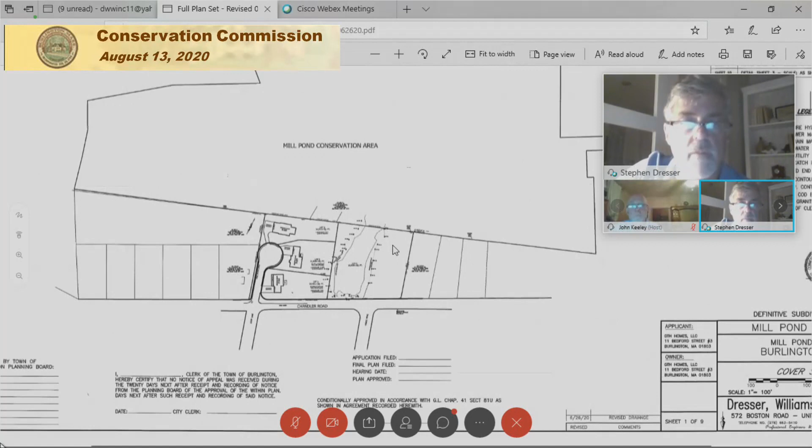For the record, Stephen Dresser, Dresser, Williams & Company. I'm representing GRH Homes. Greg Hickox and Bob Richard, the applicant, are also here on the meeting. The proposal before you is a 4-lot subdivision. It has 3 homes, a roadway, the utilities, an associated drainage system, and a 4th lot that at this time is not to be developed. The intent of the 4th lot would be donating it to the town of Burlington. We're right next to the Mill Pond Conservation Area, and this would be, I'm sure, a welcome addition to that area.

We have previously appeared before the board for a resource delineation. There is a vernal pool on the project, as well as bordering vegetated wetlands. We did receive an ORAD, an order of resource area delineation from the commission prior to this filing. Okay.

When the applicants, who just so you know, they are actually intending on living in, Mr. Richard in Lot 2 and Mr. Hickox on Lot 3, are going to build their personal homes there. When they first approached the town, they intended to build 3 frontage lots on Chandler Road. There's plenty of frontage to do that. They would have had the ability to create driveway easements and such, so they could build 3 houses. One of the houses would kind of be located behind another. When they went to the planning board, it was suggested that we make the effort to look into whether or not we could do a reduced size road with the lots and create a subdivision with the thought that it would be more attractive and fit into the neighborhood a little better. So Mr. Hickox and Mr. Richard asked me to look into that, and this is the result of that.

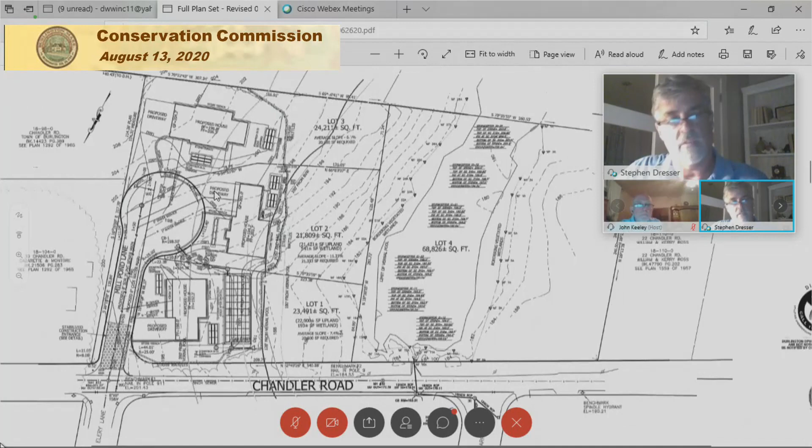Again, the reason for that is the extra protection warranted by the vernal pool. The drainage on this all kind of flows down this way. There's a high point up in this area and this area, and it flows down to this. So everything kind of flows onto this lot and then down to the vernal pool. None of this flows towards the easterly neighbors or back toward the conservation area. There's a little bit of a dip in here, so the front of the road actually comes back onto the lot as well.

The drainage is done consistent with the Massachusetts stormwater standards. The system itself has a catch basin at the low point of the cul-de-sac. Again, the flow from here, from the lots, and even the road flows down to this. This will then flow into an infiltration system. The infiltration system currently is designed with an isolator row, just to remove the suspended solids.

The soil conditions out there warrant additional pre-treatment prior to the infiltration system. We had a forebay in here, but the Board of Health, which is the advisor to the planning board under subdivision control statute, does not like to see open water of any size. It was a very small forebay that would hold water for a very short time, but they still did not allow us to do that. Hence, we went to the isolator row.

Beyond that, this week we heard from the town engineer that they are not comfortable with just an isolator row for the removal of suspended solids. They're concerned about the maintenance of it. Their suggestion would be that we put in a Stormceptor type unit in line with here.

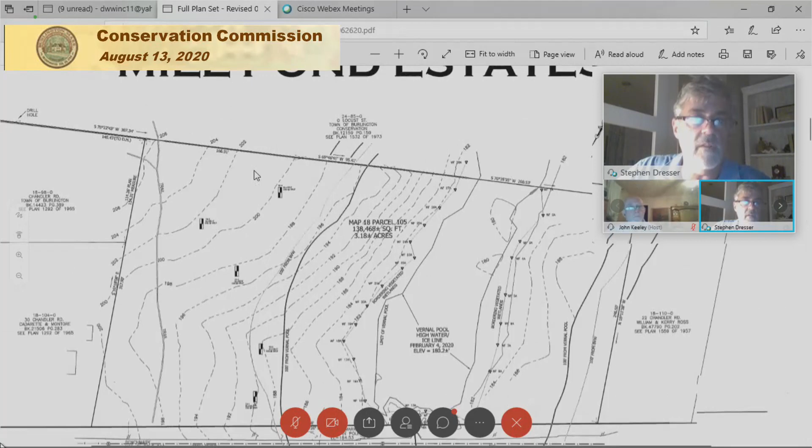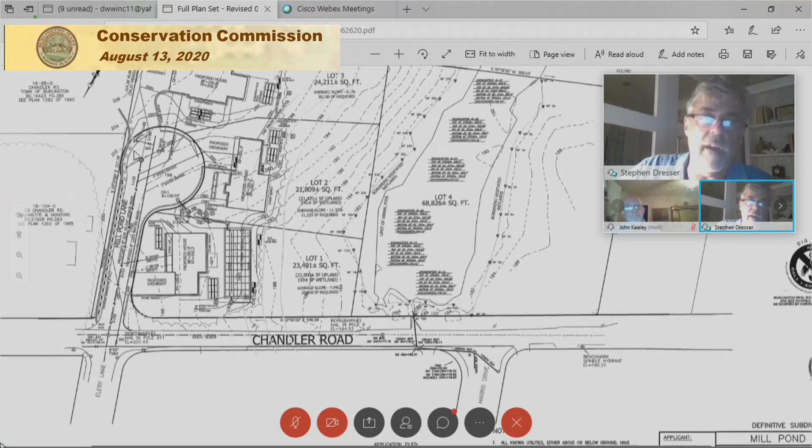One of the things going on here, there is an existing trail on this property that goes to the Mill Pond Conservation Area, as well as another trail system on this lot, which is also town of Burlington. So obviously we're building the road on that. The intent would be to put a new path from this area up and connect it into that trail system. The path would be protected by a row of arborvitaes along the roadway, and also through conversation with the neighborhood, it was brought up that path is generally just used by neighborhood people who walk there to enjoy the conservation area.

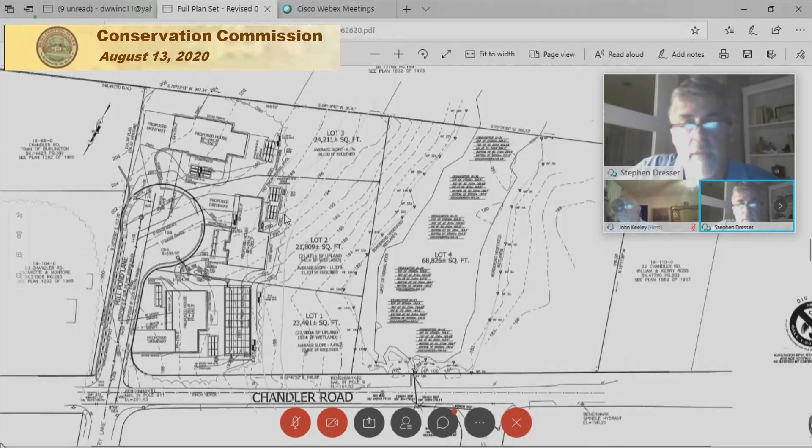Some concerns rose up with parking on this road, so Mr. Hickox has agreed to put no parking signs along that road, where there's a reduction in width from the regular subdivision control law that would make sense anyway. You don't really want cars parking on there, but he's agreed to do that. So that pretty much sums it up. If you have any questions, I'm here again, and Mr. Hickox and Mr. Richard are here as well.

Thank you. Okay, well, first we'll go to our staff, John and Eileen, and then we'll go to the commission, and then we'll go to abutters. We do have one abutters letter here with a few questions on it. So I think we should make a list.

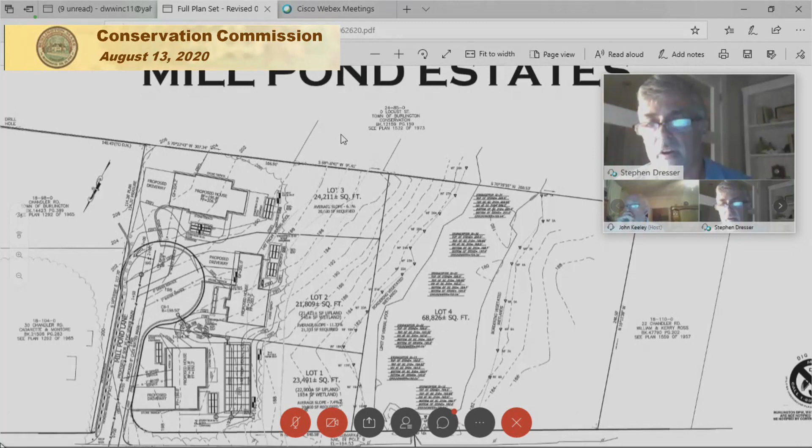We don't have a lot of time tonight to address everything, but Mr. Dresser, you're familiar with our procedure. We make a list of things, you have the same list, and then you'd usually send us a written letter to add to the file in your response. Does that sound good to you? I thought we could make a list of any issues or questions and you could respond in writing, however you choose.

All right, so John and Eileen, do you have questions or comments or issues? Sure, I'll start. First of all, I think this is a great plan.

The fact that the town would be getting a really nice parcel of land adjacent to the Mill Pond Conservation Area, which additionally has a vernal pool, would be terrific for the community. With regards to the trail, I did hear from an abutter, and what they said made sense to me. But even before that, my inclination is to put a new trail on the parcel being donated, on the other side of the vernal pool. So a brand new trail, and we'd have to cut a trail on the conservation land to connect to it. That would be further from everybody's house. There's upland to the right of the vernal pool, so people wouldn't be cutting through the yards of the new houses or coming close to the neighbors. We wouldn't require the applicant to do that - we could take care of it ourselves. I just think that would be the more appropriate place for the trail.

With regard to the stormwater, the original plan had a nice little LID feature preceding the infiltrator, which would have been nice, but the Board of Health didn't like that. So now the applicant's in a tough position, and ironically they're trying to get the 44% TSS removal not because it's in a critical area, like we usually have it, but just because of the permeability of the soils. But once again, if they put in a Stormceptor, I would say don't require - I know Steve doesn't want to go back to the Board of Health, but there's no need to put in the isolator row if they do put in a Stormceptor. They don't need to do both. That is overkill.

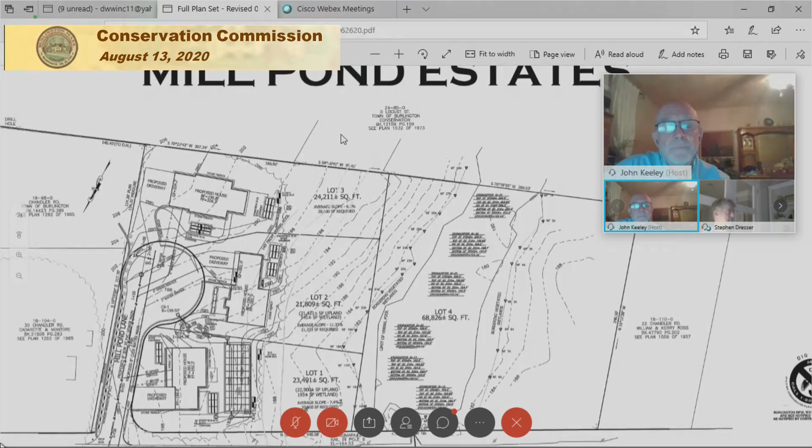As far as the waiver goes, I would certainly recommend, because you're getting this whole vernal pool donated for permanent protection, granting a waiver for the encroachment into the outer portion of the vernal pool buffer zone. So they're looking for a waiver because they're encroaching into the buffer zone of the vernal pool, which is protected area under our bylaw. But because of what they're doing to protect the rest of the vernal pool - namely donating it to the town for conservation purposes for permanent protection - I think that's a good trade-off. The motion for the waiver should state that.

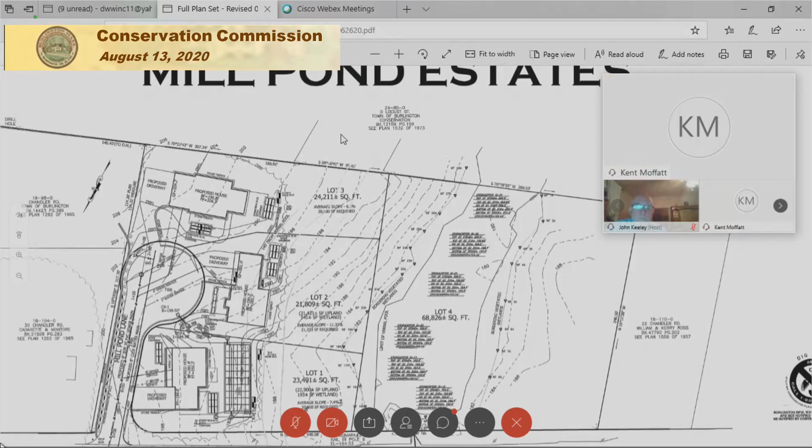Okay, so comments, issues, or questions. Let's start with Kent - do you have any comments, issues, or questions so far? Not at this time. All right, Don, do you have anything? Not at this time. Gail?

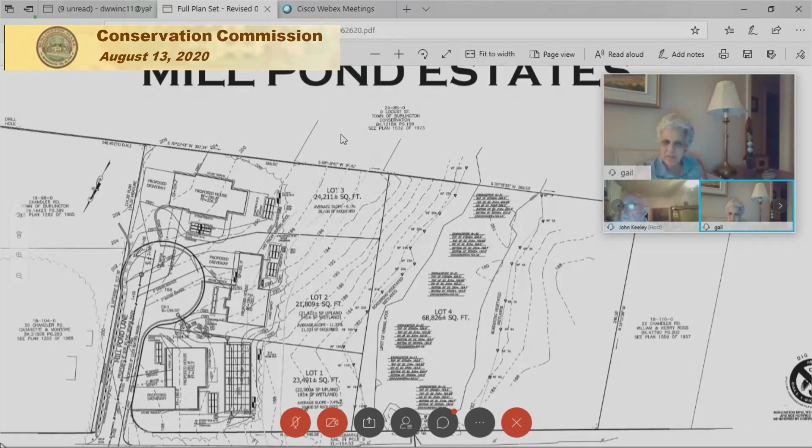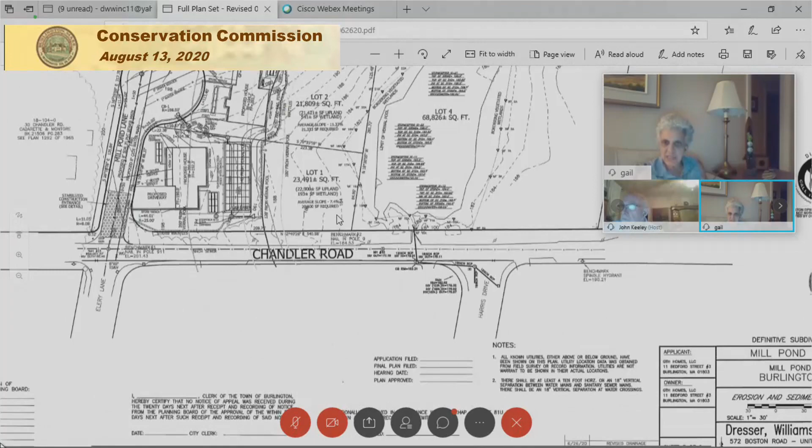Yes, I have a question. Am I reading this post-development plan correctly - do the property lines for these houses go into the wetland, the edge of the wetland? Into the lot - wetland lot 3 does not extend to the wetland, but lot 2 slightly, and lot 1. Okay, so I guess my question is, in the conditions, would we require some kind of demarcation along that back so that people won't be dumping stuff, so there's a presence showing those are wetlands there?

This plan shows a post and rail fence. It does, okay, I didn't see that. Where is that post and rail fence? Well, you can see it labeled on lot 2.

Okay, but that would be a requirement, obviously, of the commission. Right, in the conditions, yeah. Okay, just checking that.

And I agree with you, John, about the path from Chandler. I think that would be better because when I was reviewing these earlier, the path looked like it was going to cut through the wetlands. But I'd rather be on Chandler Road for all the reasons you said. That's it for me, thank you.

All right, Indra, you have anything on this? Nothing at this time. Bill, anything?

Yes, I agree that we need to demarcate with the fence to separate the wetland from the usable property. A couple of questions on the drainage system. I just want to make sure that test pits will be done to ensure that they will function, and there'll be some documentation that they have adequate capacity.

Yes, we did do test holes that were witnessed by the Board of Health. I probably should have mentioned there's additional drainage mitigation from gutters, individual infiltration systems, and stone around the buildings as well. One of the Board of Health requirements is to perform additional test holes in that area. So all that will be taken care of.

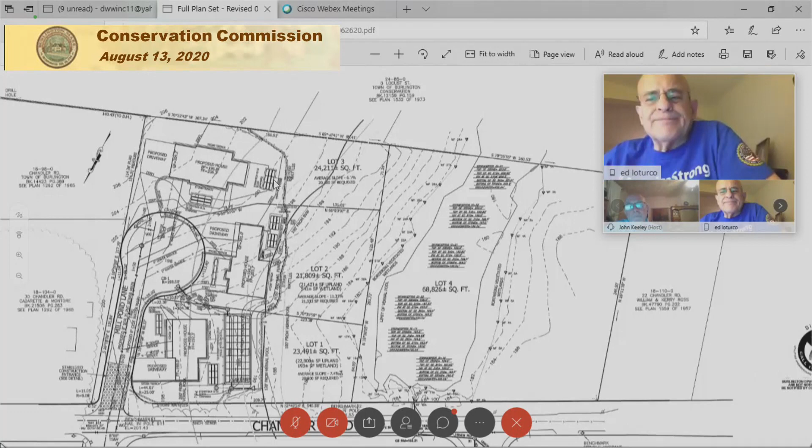All right, I had a couple of questions. First is, this subdivision you have proposed here, Mr. Dresser, is this going to interrupt the water going into the vernal pool in a significant way or not? Or how would you respond to that?

It's going to recharge to the groundwater system, so it will be captured. It will not have the same overland flow to the vernal pool, but it will go into the groundwater system quickly, as we stated, they're rapid infiltration rate soils. So it will go into the groundwater at a good pace. Groundwater will eventually become water in the vernal pool.

So, Mr. Dresser, would you say the groundwater flows in the same direction, downhill, likely, as the topography? Yes, with this type of soils for sure. Okay, all right. So that should show up as a finding, possibly, Eileen, on this one.

Second of all, it looks to me like, Mr. Dresser, particularly in Lot 2, there is almost no provision for a backyard. So what protection do you offer the commission with this plan that the majority of the 100 feet, which is supposed to be protected, is protected? I don't know if you get what I'm saying, but I am concerned that it's going to be developed, and the purpose of our regulations is to provide the first 100 feet from the vernal pool as a resource area. So how do we... There's very little. The roof runoff goes to the infiltration system.

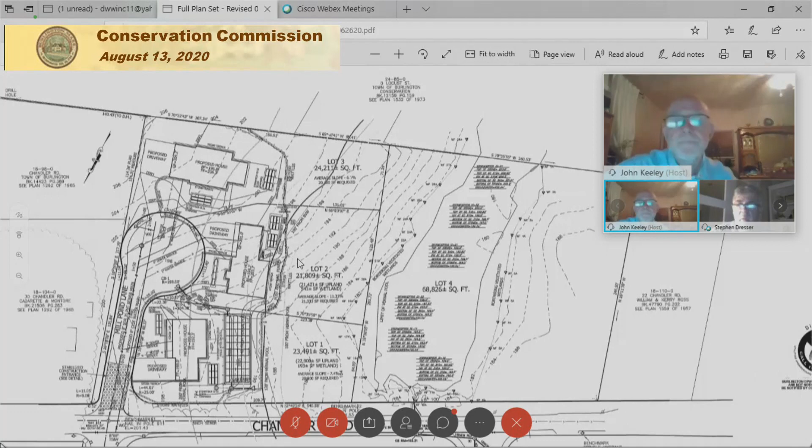Okay, so let's say Conservation Commission will check the 20-foot no-disturb. Yeah, because that would allow some flexibility in the distancing of that fence. Right, it could, yes.

And Mr. Dresser, do your soil tests indicate that you will have 2 feet of separation from the bottom of the infiltration to the seasonally high groundwater? Yes. Okay, is it not close at all, or is it? Oh, it's 2 feet plus, I mean in some areas I'm sure it's close. Okay, that's the requirement. And this is the seasonally high groundwater, right?

Yes. Okay, I'm reading soils on the test pits. Correct, mottling. Okay, soil, what they call redoximorphic features now. Oh, is that what it's called now? Yeah, okay, they graduated from mottling.

Okay, in the construction of this, how much disturbance is there going to be in that first 100 feet? And do they need any restoration? Well, there's no disturbance in the first 100 feet.

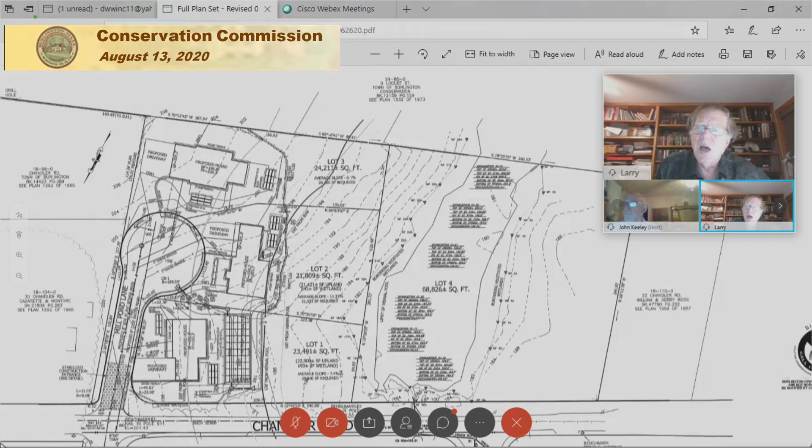And if an isolator row ends up being installed, will you have the ability to inspect it? Is it easily inspected? Yeah, there's an open manhole at one end, and there's inspection ports on each row - would have at least one inspection port.

Okay, all right. So I think now, do we have anyone in the audience for this? This is a public hearing, and we can take comments and questions from abutters and others.

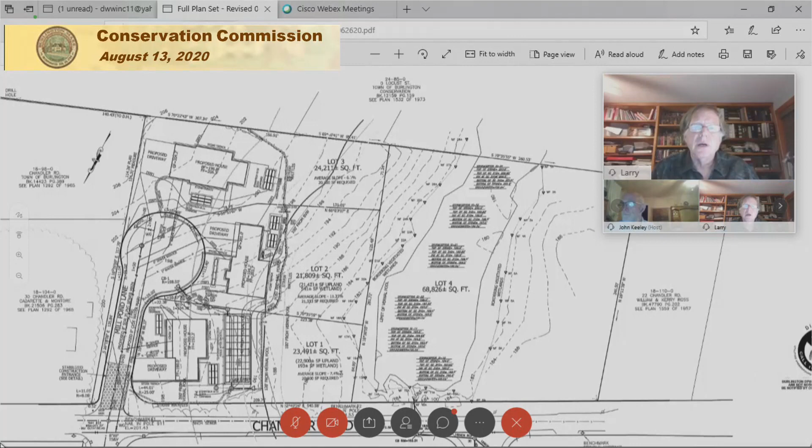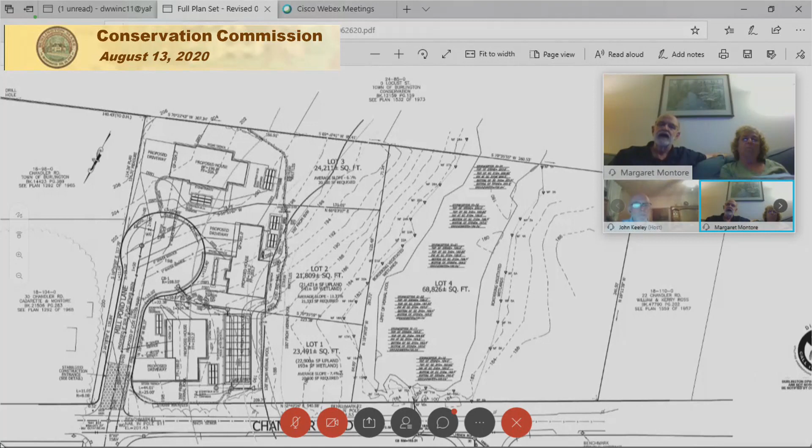A couple of comments and a few questions. The first comment is to John. I very much appreciate your idea of moving this path to the other side of the property, because I think there was no way we weren't going to have people coming onto our land and creating a liability problem. And I think even if it is done, it would be really good if the new pathway could be cut earlier rather than later, because if there's not a pathway for people to take while the development is being made, we're still going to end up with folks coming in over our property.

But our main concern is one of water, and we're not sure if this is the right place to bring this up. Because we're on the eastern side and the high side, I was looking at the development plans, the intent plans for the proposed development, and it looks, if I'm reading it right, that about 18,000 feet of our property flows towards the development. So we have a concern about there being an impervious road put right on the edge of our property that may impact that flow, because we already have a lot of wet area in our backyard in the spring, and a sump pump for 6 to 8 weeks. And then there's going to be construction putting in basements, possibly impacting that flow.

And as the road gets cut down, it's going to be cutting into the roots, removing trees there, and probably cutting into the roots of the trees on our land, meaning we'll probably lose some of those trees. So all of this gives us concern about the impact on the normal flow of water from our land towards the vernal pool.

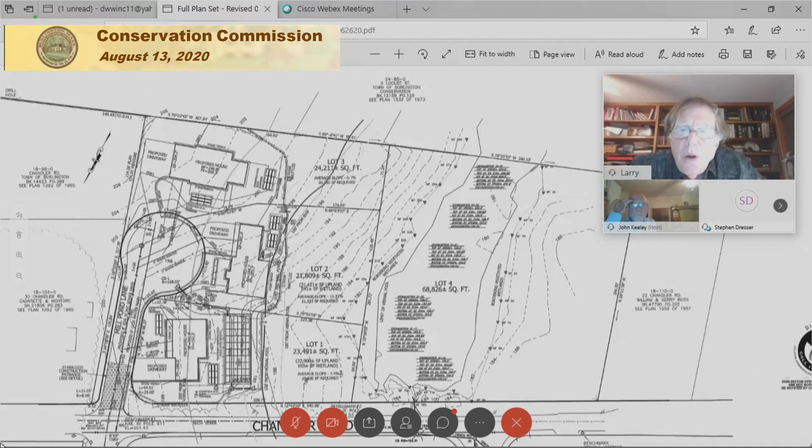Mr. Dresser, is that something you could take a look at along the boundary between the two? Yeah, but there's no berm, no intention to block water, so the surface flow will just continue, flowing onto the roadway and then into the catch basin. So there'll be no blockage of water coming down, it'll still be continuous flow, so there won't be any elevation change. There's no elevation change, and there's no curb proposed on that side either.

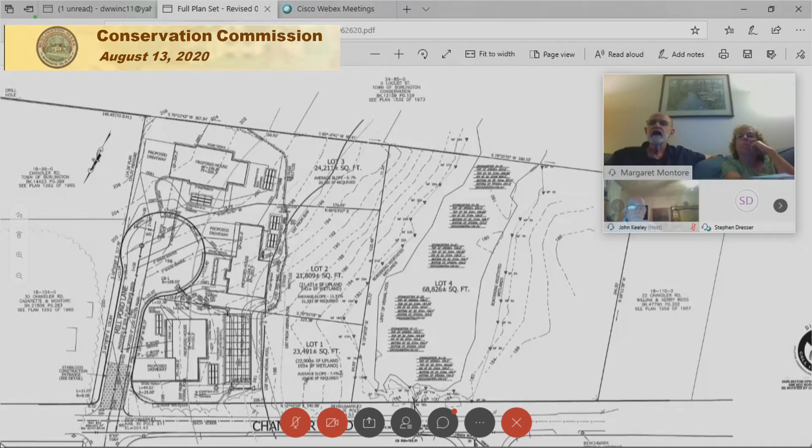Was that your intent, Mr. Dresser? Because we saw that, but we couldn't figure out why there was no berm on our side of the property. We're also concerned about, in the winter when there's sand and salt on the road, it's going to get plowed onto our property, especially in the back of the cul-de-sac where it literally touches our property line. The right of way is up to your property, but the pavement is not up to your property line. So the circle is right on your property line, but the pavement is actually about 8 feet off — I can give you the exact distance.

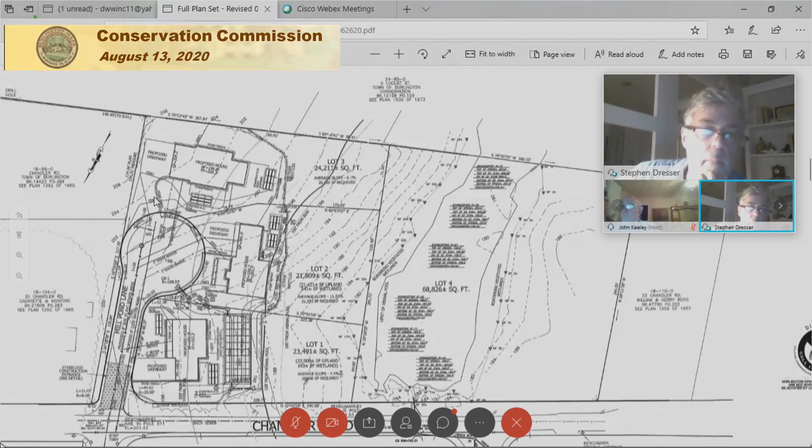The same thing down at the entry to the road — there is a distance there, I'm thinking about 8 feet, but I don't have that in front of me. We had a discussion with Mr. Hickox last week, and he said someone from your office would hopefully be coming out soon, and we'd get a chance to talk and see where the actual property line is.

Yeah, we talked about staking that line. We can stake it if Mr. Hickox said that was okay. We had intended to do it pre-development, but we can do it quicker, and I'll gladly be out there and explain it to you with a set of plans in front of us. That would be great, we really appreciate it. So, Mr. Dresser, you'll agree to verify the distance that's unpaved from that eastern boundary. Yeah, okay.

Any further comments from anyone?

And the distance to the eastern boundary that is unpaved next to 30 Chandler Road needs to be specified in a bit more detail. Is there other things that we're looking at? John, did you hear anything else that you need?

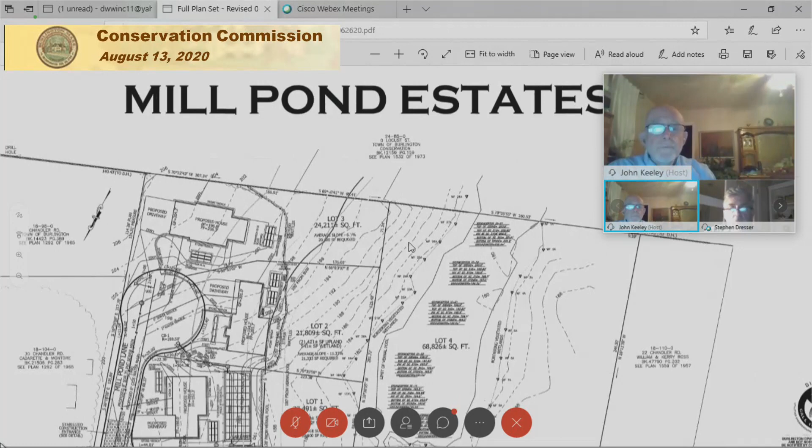Okay. Anything else? It would be helpful to me if we had not only the line of 100 feet from the BVW, but also the line showing the 100-foot buffer from the vernal pool.

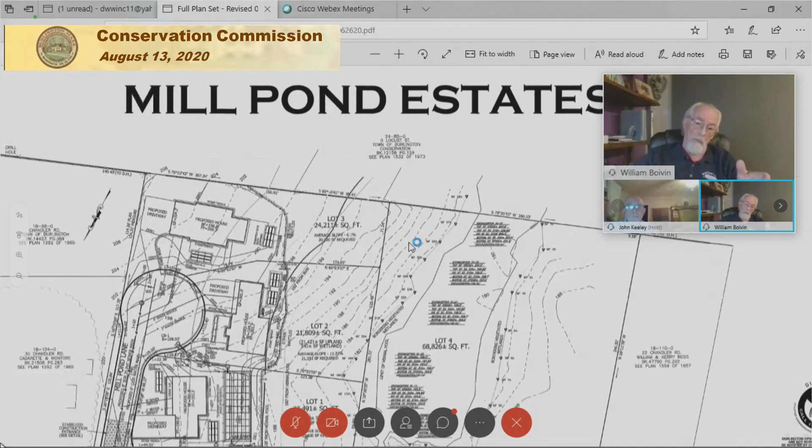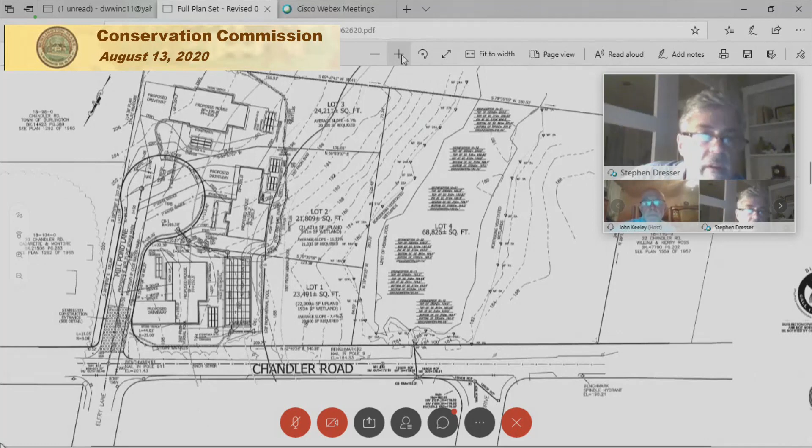It doesn't show up very well on these plans, Bill, but it is on the plans. There's 100 vernal here. This dark line is actually the 120. That one came out - we used the wrong color on the map. The 100 is down here. Let me see if I can zoom in on it. Right here. Enlarge your view. You can see it on your own computer, Bill.

Okay, now that you pointed it out, I'm looking at a different version, I think. And this is the 120 and the 140. It was just apparently in a color that didn't scan well. Okay, I see it now. I thought that was just an elevation line. Okay, so that's the 100 feet from the vernal pool.

All right, thank you. I know it's getting late, but I just looked at the regulations. So the 20-foot and 40-foot are from all resource areas, so that includes vernal pools, so it would require waivers. But it falls within the buffer zone. I was just reading it too - it says resource areas, but it's in section 21.9, which is buffer zones.

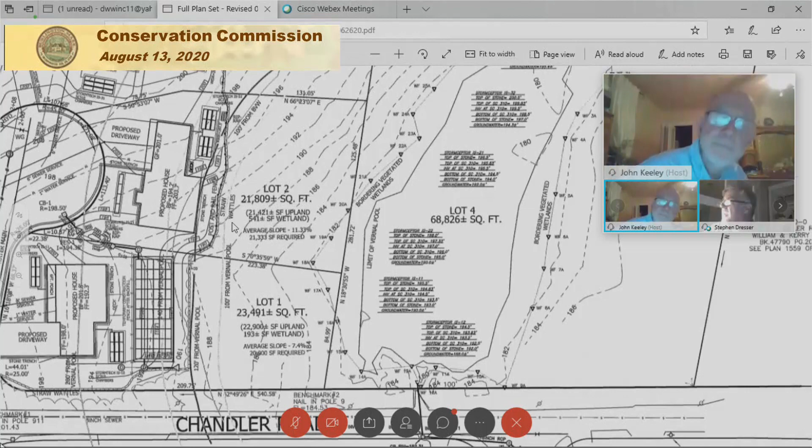Right. That's buffer zones to all resource areas, not just buffer zones to BVW. Okay, buffer zones include other resource areas - is that what you're telling me? Right. Okay, so just the justification, John, for the waiver is that we're getting a substantial donation as Lot 4.

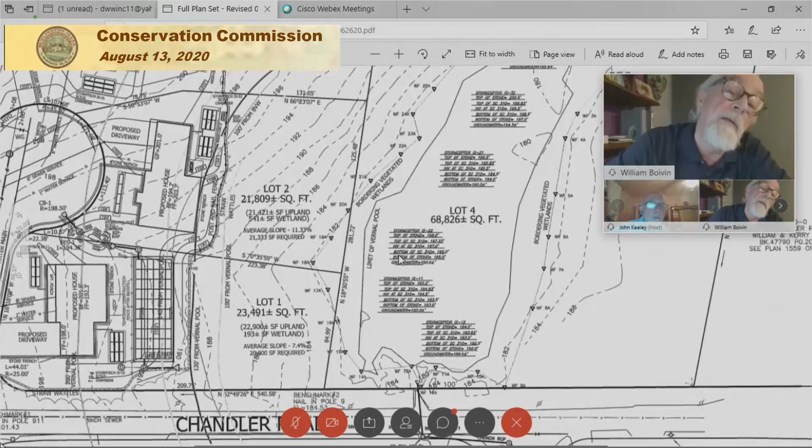Right, not just the donation. It'd be very protective of the vernal pool to permanently protect it. Okay, right, so you're losing some of the buffer zone to the BVW, to the vernal pool, but you're protecting a large area around it in perpetuity. Okay, got it, got it.

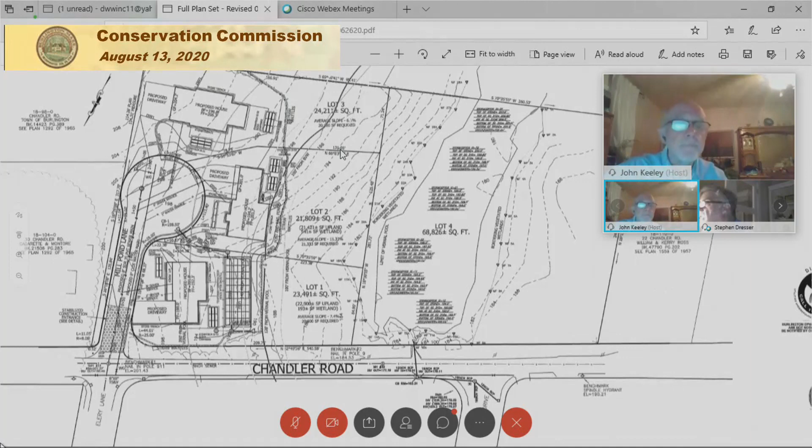And that line that says 100 foot from the vernal pool is really under our bylaw definition - that's the vernal pool. Limit of the vernal pool. Right. Okay, thank you.

Okay, all right, so unless someone else has something to say, perhaps we should move along. The next meeting is September 10th. I assume, Mr. Dresser, you'll give us a motion to continue, a note to continue till September 10th.

Yep, please do that. Do a roll call. Anything else? All right, is that supposed to be a motion, John? Yeah, and a roll call. Yes, all right. Could I have a motion to continue this hearing until September 10th? Is there a motion? Move, Gail.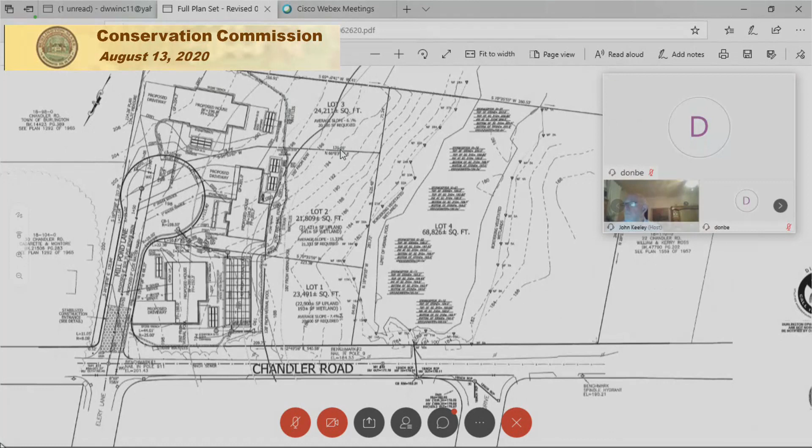Second, Indra. All right, Dawn, how do you vote? Yes. Gail? Yes. Indra? Yes. Phil? Yes. Ed? Yes. Chair votes yes, 6-0. This hearing is continued until the meeting on September 10th, virtual public.

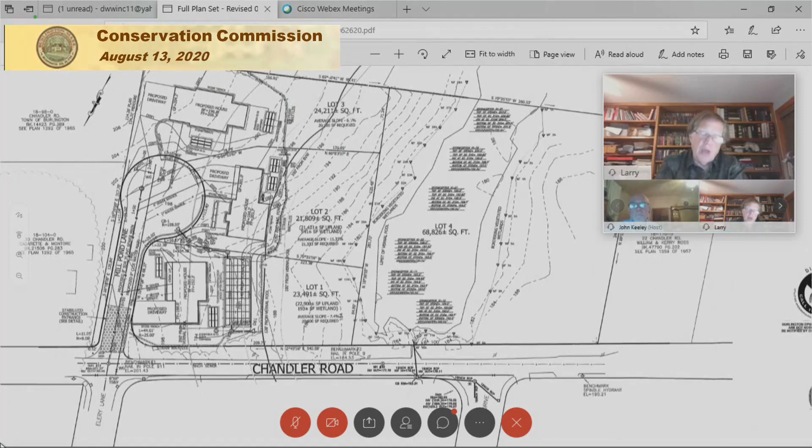Hi, Larry. All right, next we have, want to read the notice? We have one more public hearing. It's a notice of intent for 3 Lido Ave by Grace Castelluccio to construct a new single-family house with filling and grading.

I'm sorry, I guess you're waiting for me. This is to take all information related to an erosion and sedimentation control permit application filed by Grace Castelluccio for construction of a new single-family dwelling with associated filling and grading activity at 3 Lido Avenue in Burlington. Application is being heard pursuant to Burlington Bylaws, Article 14, Section 6. Commission will review all information relative to this application and thereafter may issue an erosion and sedimentation control permit for the proposed activities. Application may be viewed at the Conservation Department webpage.

All right, is there someone here for this project? She doesn't appear to be on right now, so I can just start. I can maybe share her plan and describe the situation, and maybe she'll appear, if that's okay with everybody. Please do. Okay, well, unfortunately, so what happened was they got an administrative erosion control permit to build - I'm sorry, trying to do this at the same time as I'm speaking. Give me one second to actually open this up. All right.

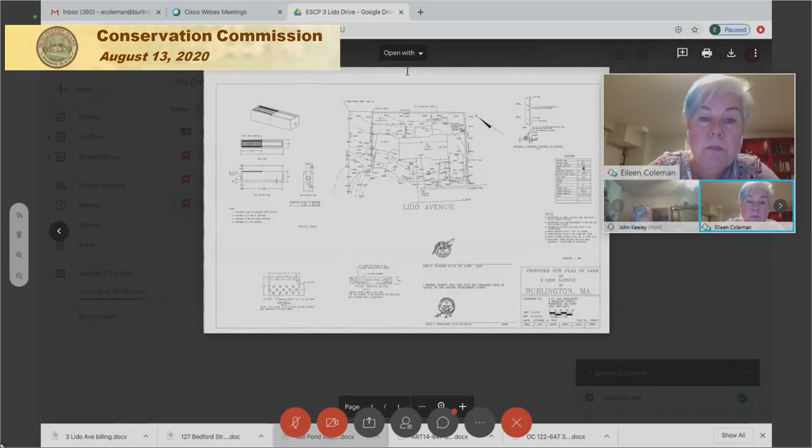So as I was saying, the applicant got an erosion control permit, an administrative erosion control permit for disturbance of land under 20,000 feet back in January, because that was their plan. As you can see, they had a proposed limit of work that was going to keep them around 20,000 square feet. But since then, they put in the foundation and discovered that this limit of work was just not possible to adhere to.

So at various times they've moved the wattles and they've kind of gotten in trouble with me for that. So they came back and decided that they actually want to grade the whole property, which means they're adding this 5,000 square feet in addition to the original 20,000 square feet. And they want to remove some great big boulders down here, either pare them down or remove them, and grade across this land. So it now becomes a full erosion control permit application.

This is the old plan. They haven't yet gotten us the new one. It was supposed to be in by today, but it isn't. So at least this gives us an idea about the size. The existing foundation is in place. It's an enormous house — the square footage is approximately 4,506 square feet.

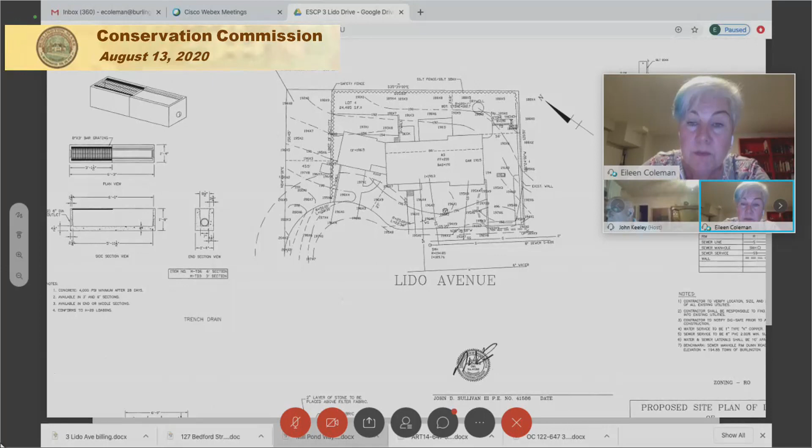And then the driveway is also large, about 2,160 feet. The driveway is pitching back towards this drainage feature, and then a stone trench, and overflow will go into the dry well. They hadn't yet really figured out what they were going to do for stormwater infiltration for the house.

So when we were out on site yesterday, Larry and some of the other commissioners noticed that there is a kind of, I don't even know what to call it, a trench, a gully back here. And Larry wondered if they could use that for some kind of stormwater. And in fact, that is exactly what the engineer has proposed.

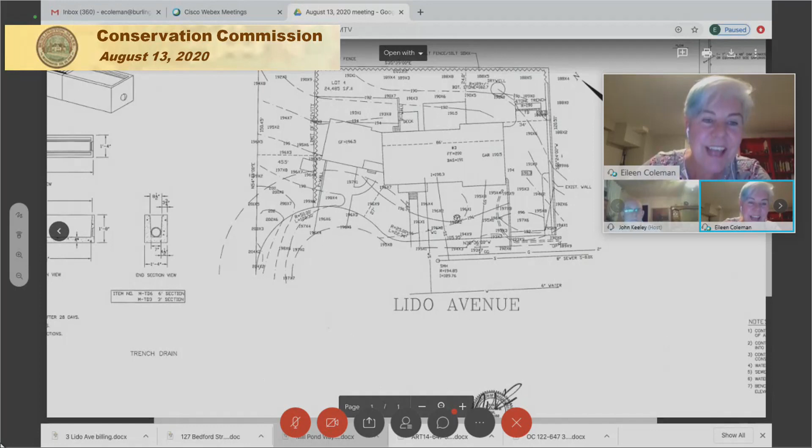He did, even though he didn't get the new plan to us, send a detail at 5 to 7, which I hadn't even had a chance to look at because it was literally sent at 5 to 7. We can just take a look at that and see if that makes anything clearer. Oh, here we go — maybe this is the whole plan.

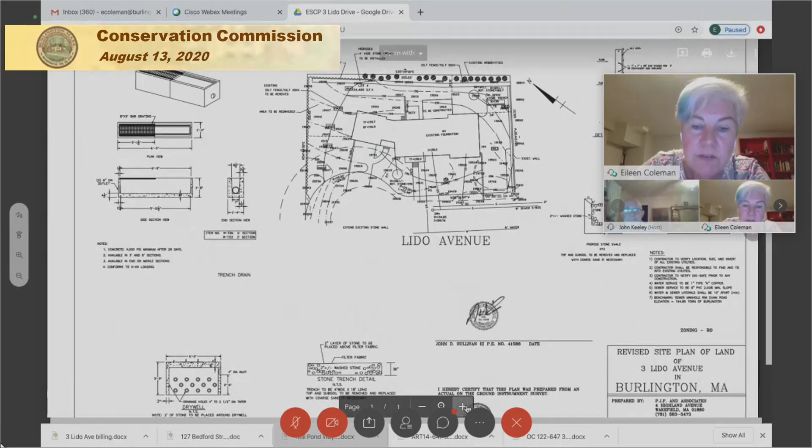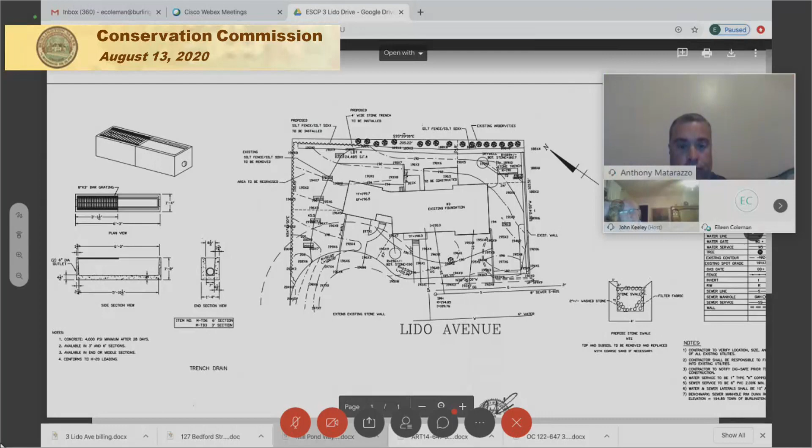Okay, so this in that case would be the stone swale that I think he's talking about over here, along where the arborvitaes were. A 4 foot wide stone trench to be installed with a stone swale, washed stone, filter fabric. So anyway, there it is.

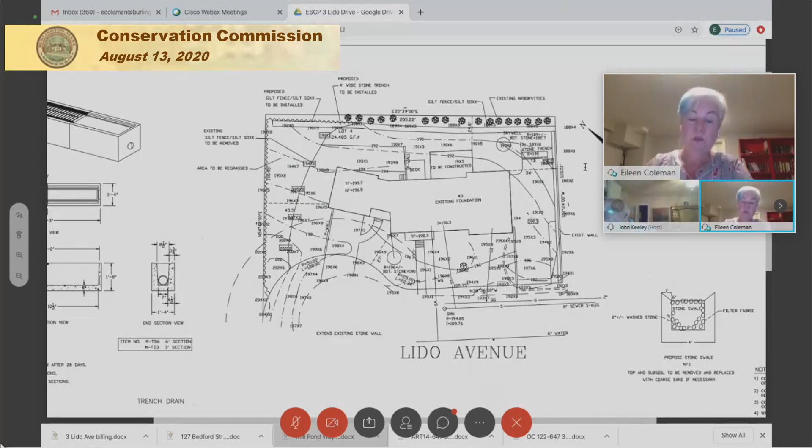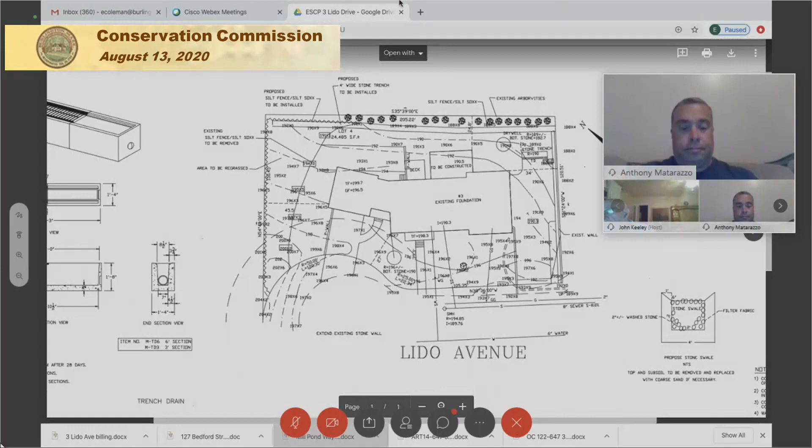Since Grace isn't on, I kind of described as best I could what the plan is. So, is somebody else on to speak? All right, let's just see if there's any comments first, and then we'll go from there. Dawn, Kent, Gail, or Indra.

This is an erosion and sedimentation — so you mean the plan that Eileen just showed? It's kind of difficult to comment on that without actually having it. Without having the plan, I can forward it to everybody now, but I mean, it's kind of late. Yeah, right, all right.

I just called on Kent, Dawn, Gail, and Indra. How about Bill and Ed? Any comments?

I have a comment that I'm not crazy about just using a stone trench for all the rooftop runoff from a house of that magnitude. That 4,500 square feet you mentioned is just the footprint of the house, so there's a lot of rooftop there. And there's a pretty significant gradient down right from that, right at the edge of that trench, down to the property behind it.

To me, it should be more comfortable if it were infiltrated into the ground closer to the house. Yeah Bill, I was thinking along similar lines — that for something that big, rooftop and land, they need an engineered trench with a detail, a cross-section detail. And I thought on the far left-hand side, perhaps they need a dry well of some sort for the water to go into.

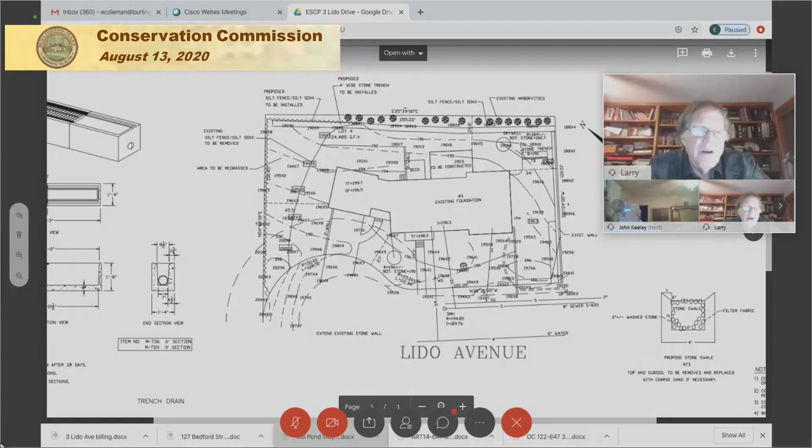Do they need any erosion controls in the front at all? Anybody who was there feel they could use some erosion controls in the front? It slopes gradually to the street in front too. I do feel they could use erosion controls, but by the time it got to me, the demolition had already happened, so I'll get them to put some more erosion controls. It's unstable in front now.

Is there comments from anyone else? Those are the two issues: how to handle the water, and I'll make a little erosion in front, controls in front.

In the meantime, do we need any erosion controls in the back? There are erosion controls in the back, the wattles that they put in the back ended up in the gullies we were talking about earlier. So the gullies, those little trenches, are probably catching any sediment anyway, as well as the wattles. I think the front definitely, back not so much. I'm not sure about that. I don't know, but we can look at that too.

Is there somebody else here who wants to talk about this project? Yes.

Hi, this is Anthony Matarazzo. I live on 2 Dartmouth Road. Sure, and I just...

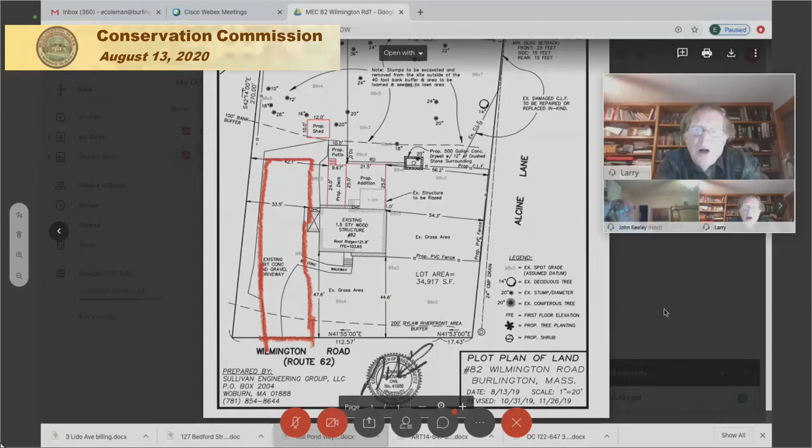Hello? I called in, can you guys hear me better? I think so, yes, are you on a phone now? Yes, I'm on a phone. Okay, would you like to say a few words, sir? Yeah, so I talked to Eileen, and what we're going to do is—right now half of my driveway is pavement, the other half is gravel, and I reached out to see if it was possible to pave the entire driveway. I also reached out to you guys at Conservation, and to Mr. Hayes, to make sure you gave me permission, and to make sure he would give me permission as well.

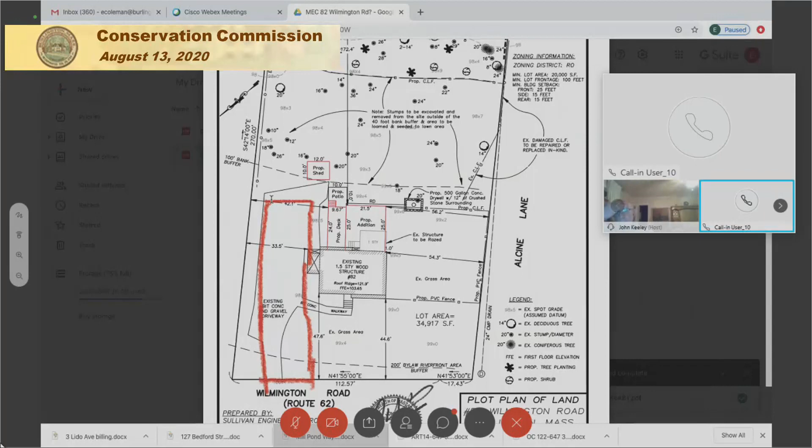Okay, comments by John or Eileen on this one? I'm not sure if John's going to say anything, but I was just going to say that this had been the subject of an NOI, and he worked with Norse Environmental to propose this restoration plan. He's been very diligent about working with us, and very good to work with. So I think this is a change that can be made to the order of conditions under a minor engineering change if you're amenable to that.

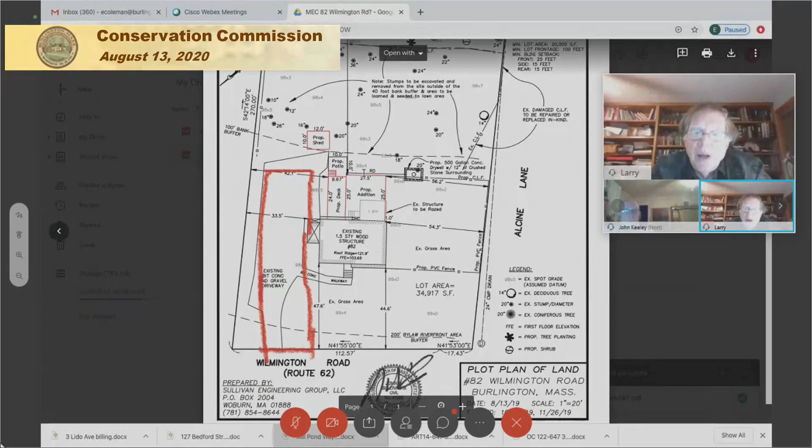The edge of the pavement is about how many feet to the wetlands? It looks like it's pretty far out. It's outside the 100-foot buffer to bank. It's in the outer riparian.

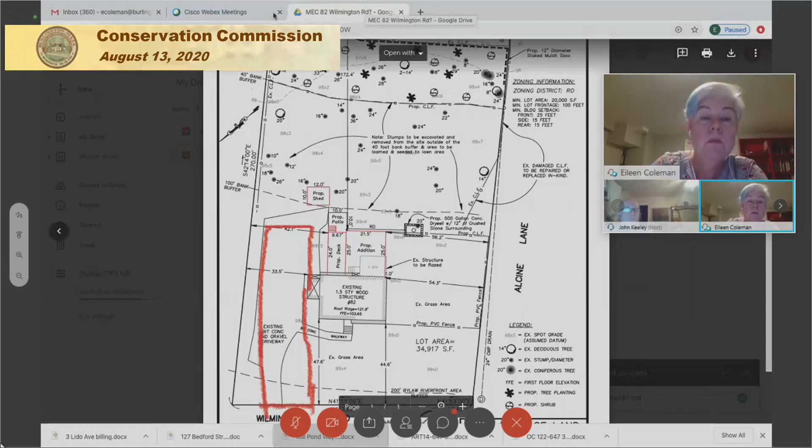Do you have any objection to the paving, Eileen? I don't. We spoke to Adam about making sure that this is pitched such that it is not going onto the roadway, and I believe he might be able to give us some more detail about that. But that is their plan. Can we do this as a minor engineering change? I think so, if you're asking me.

Kent, Dawn, or Gail, anything on this one? Just a rough estimate, how much of the area is being paved, what was gravel? Approximately 525 square feet. Existing driveway is how long? The paved part, the driveway, is approximately 80 feet long.

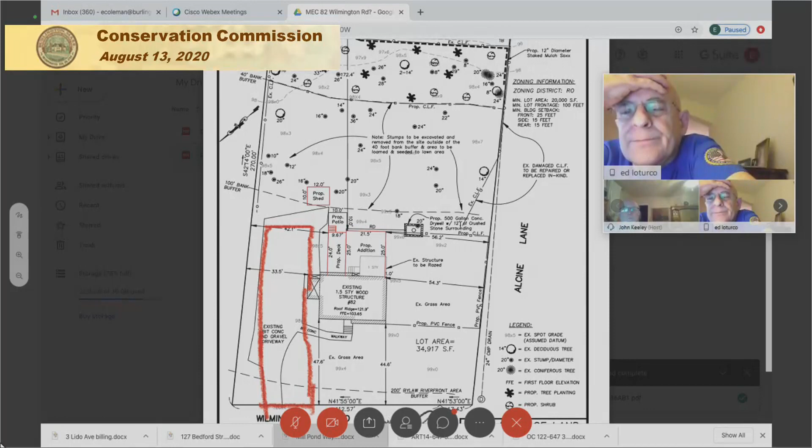Mr. Lampone, I think you have been good to work with to correct the unfortunate cutting on the property, and you have adhered to the instructions of the commission, and I see no reason why we can't approve this as a minor engineering change.

So with that as a motion, could I have a motion to approve a minor engineering change for the project described to pave over the existing gravel? So moved, Indra. Second, Ed. Don, how do you vote? Yes. Gail? Yes. Indra? Yes. Bill? Yes. Ed? Yes. Chair votes yes.

That's six to zero. The paving of the gravel driveway is approved, sir. Thank you very much, guys. Thank you for staying on so long, waiting for this moment. I appreciate it, thank you. Take care, good luck. Thank you, bye-bye.